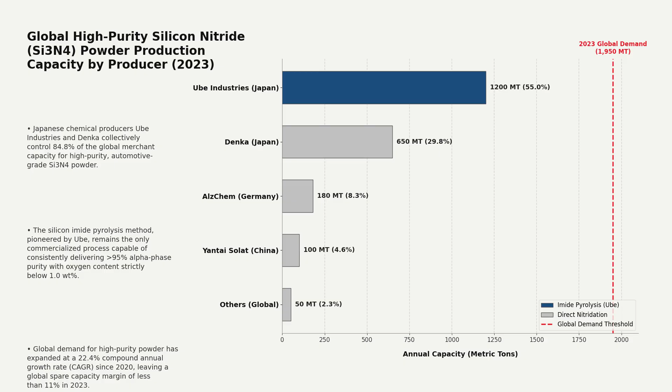Global demand has expanded at a 22.4% compound annual growth rate since 2020. This rapid growth has reduced the global spare capacity margin to less than 11%. The scarcity of high-purity powder has directly impacted downstream automotive manufacturing. Lead times for precision hybrid ceramic bearings escalated from 12 weeks in 2020 to 52 weeks in 2024.

This surge directly tracks the market penetration of 800-volt drivetrains. During this same period, the price index for high-purity silicon nitride powder rose by 210%. High energy intensity in precursor synthesis and slow capacity expansions have capped output.

Automotive manufacturers cannot easily substitute these components. High RPM drivetrains operating above 20,000 RPM require the dielectric properties of ceramic bearings to prevent catastrophic failures. The transition to high-efficiency silicon carbide inverters remains physically bound by these chemical processing limits. Alternative synthesis routes, like direct nitridation, struggle to meet strict automotive standards.

Direct nitridation of silicon powder fails to consistently achieve the 95.0% alpha phase purity required for high-fatigue applications. This structural deficiency leads to premature mechanical failure under high rotational stress. Furthermore, excess oxygen content in alternative powders degrades grain boundaries. This degradation causes the ceramic balls to fail at high speeds.

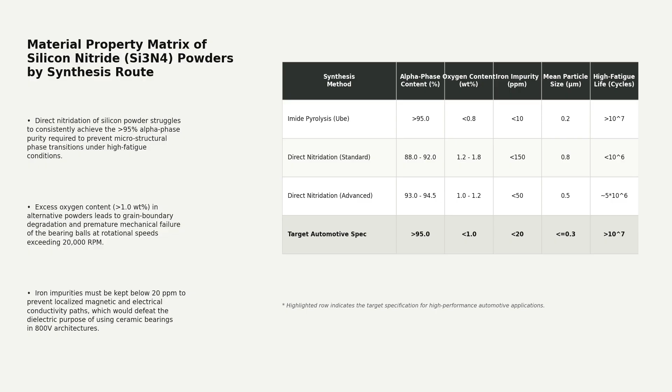Iron impurities must also remain below 20 parts per million to prevent electrical conductivity paths. These strict chemical parameters protect the dielectric integrity of the bearing. Consequently, the automotive industry remains dependent on the specialized imide pyrolysis process. This material reality limits the speed of the global electric vehicle transition.

The rapid scaling of offshore wind turbine architectures has outpaced the civil engineering capacity of maritime ports. To lower the levelized cost of energy, manufacturers have expanded turbine capacities from 5.0 megawatts in 2015 to 15 and 20 megawatt platforms today. This transition has driven a nonlinear increase in component mass and physical dimensions. Modern nacelles now exceed 820 metric tons, requiring specialized quayside load-bearing capacities.

Legacy port infrastructure at Esbjerg remained capped at 40 metric tons per square meter. This structural deficit prevents the handling of 15 megawatt-plus turbine components without risking quayside structural failure. By 2030, planned 20-megawatt turbines will feature nacelles weighing 1,100 metric tons. These systems will require 70 metric tons per square meter of bearing capacity. This requirement exceeds even the current expansion designs, threatening to cap future turbine scaling.

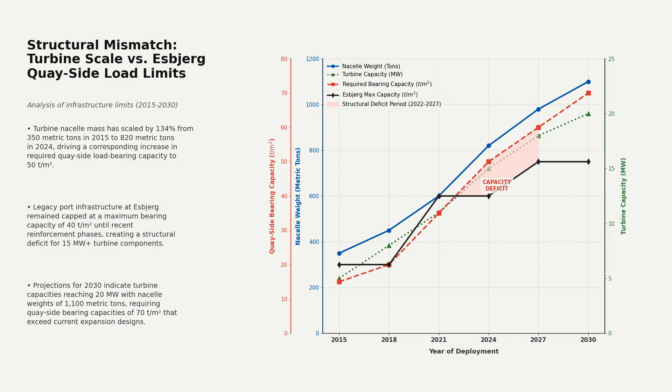The lag in civil engineering projects directly delays regional decarbonization targets. The cumulative North Sea offshore wind installation backlog is projected to peak at 4.2 gigawatts in 2025. This bottleneck directly correlates with the delayed expansion of the Esbjerg terminal. Soil consolidation and marine dredging requirements prevent the new 500,000 square meter quayside area from reaching operational status until late 2027. This multi-year timeline leaves developers without adequate pre-assembly and storage space. The physical limits of landside integration have become the primary constraint on offshore deployment.

This terrestrial bottleneck is compounded by a shortage of specialized maritime assets. The global fleet of wind turbine installation vessels capable of handling 15 megawatt-plus systems remains highly constrained. The fleet is projected to grow from just 2 vessels in 2022 to 11 by 2027, leaving little margin for operational delays.

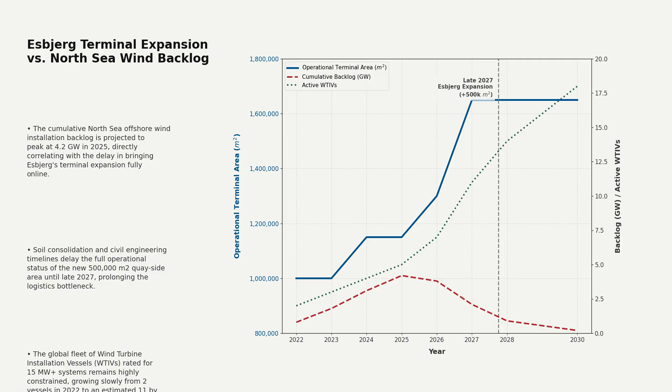The transition to 5G telecommunications and high-voltage electric vehicles has placed unprecedented stress on passive component supply chains. A single premium electric vehicle requires up to 10,000 multi-layer ceramic capacitors. These components rely on ultrafine barium titanate dielectric powder to stabilize voltage and prevent electrical noise.

The production of this critical material is highly concentrated. Two Japanese chemical companies, Sakai Chemical Industry and Toda Kogyo, control 75% of the global merchant market. This creates an acute geographic and industrial bottleneck for advanced electronics.

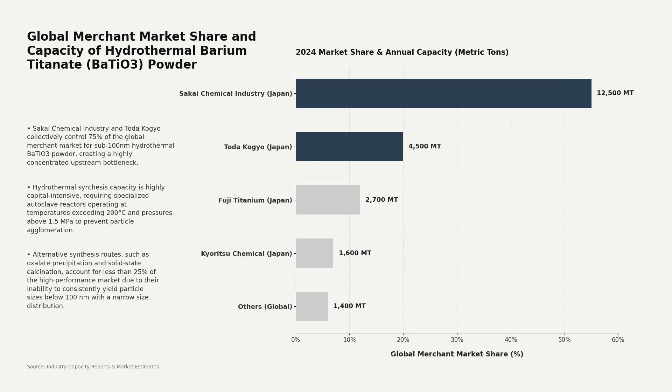High-performance capacitors require hydrothermal synthesis to prevent particle agglomeration. This liquid phase process requires specialized autoclave reactors operating at high temperatures and pressures. Alternative synthesis methods cannot consistently produce the sub-100 nanometer particle sizes required for modern high-density applications. To increase capacitance within standardized footprints, manufacturers must stack hundreds of ultra-thin dielectric layers.

Since 2015, dielectric layer thickness has decreased by 79%, now reaching 0.25 microns. This shrinkage forces a corresponding reduction in barium titanate particle size to under 35 nanometers. At these microscopic scales, material uniformity is critical. Any particle size variation exceeding 10% of the layer thickness causes localized dielectric breakdown. In high-end automotive capacitors with over 1,200 layers, such defects can reduce production yields by up to 40%.

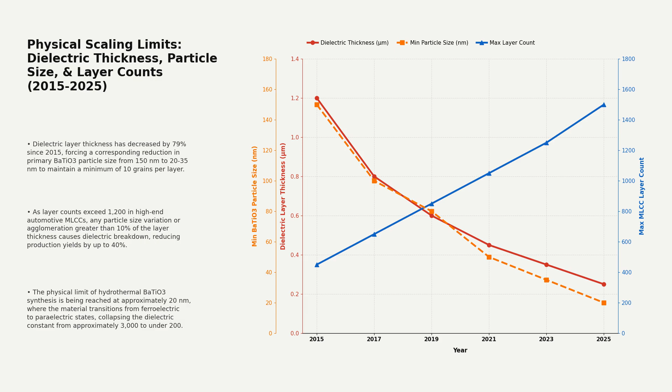Furthermore, the industry is approaching an absolute physical limit at 20 nanometers. Below this threshold, barium titanate transitions from a ferroelectric to a paraelectric state. This phase change collapses the dielectric constant from approximately 3,000 to under 200, rendering the material useless for high-capacitance applications.

The Iberian Peninsula operates as a structural energy island within the European Union. Despite possessing over 30% of Europe's total regasification capacity, Spain and Portugal remain physically isolated from the broader European gas grid. This isolation is enforced by the Pyrenean mountain range. The landside pipeline network crossing the Franco-Spanish border is limited to just 2 interconnectors. Together, the Larrau and Biriatou pipelines cap maximum export capacity to France at just 8.0 billion cubic meters per year. This represents a permanent ceiling on Iberian energy integration.

During the peak of the European energy crisis in 2022, Iberian LNG imports rose to 36.5 billion cubic meters. Yet, 35.5 billion cubic meters of regasification capacity sat idle. The Pyrenean bottleneck allowed only 11.1% of Iberia's total capacity to flow north. This physical bottleneck has driven severe economic inefficiencies across the European continent.

To replace Russian pipeline gas, Central European nations bypassed low-cost Iberian infrastructure. Instead, they deployed temporary floating storage and regasification units in the North and Baltic Seas. These emergency marine deployments came at a massive premium. German floating terminals cost an estimated 220 million euros annually for 15.0 billion cubic meters of capacity. In contrast, the permanent deepwater terminal at Sines operates at just 45 million euros per year.

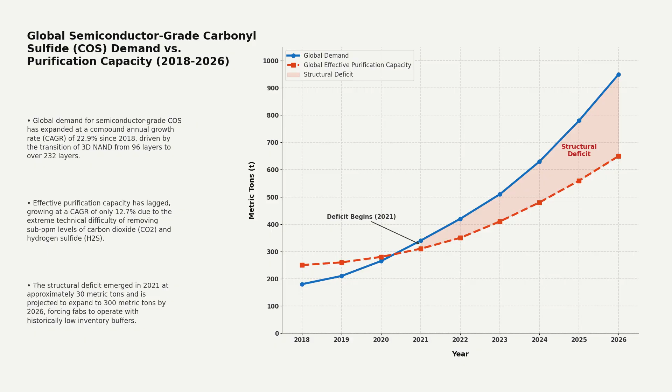As memory layers stack higher, the process window for successful etching shrinks. Carbonyl sulfide flow rates in the plasma chamber must scale nonlinearly to maintain sidewall passivation. Flow rates rise from 5 standard cubic centimeters per minute at 64 layers to 150 at 320 layers. The protective sulfur polymer layer must also thicken to withstand prolonged high-energy ion bombardment. Without this precise passivation, lateral etching causes channel bowing and structural collapse.

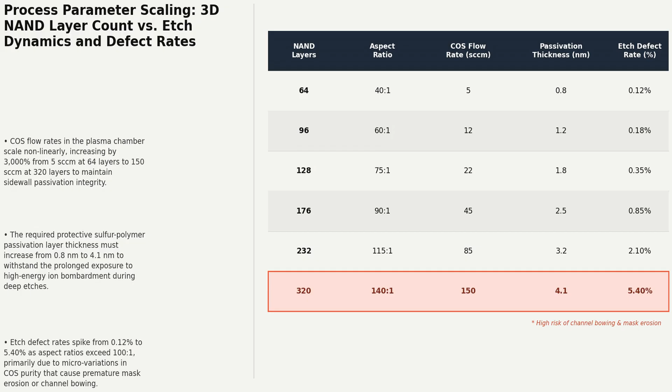Consequently, minor variations in chemical purity cause etch defect rates to spike. At aspect ratios exceeding 100:1, defect rates rise from 0.12% to 5.40%. This exponential risk profile makes advanced memory fabs highly sensitive to chemical consistency. The physical limits of silicon are now governed by sub-parts per million chemical purity.

The supply chain supporting this critical process is highly consolidated. Two Japanese chemical manufacturers, Resonac and Kanto Denka Kogyo, control over 60% of the global merchant market. This geographic concentration exposes the entire semiconductor industry to single point-of-failure risks. Expanding capacity outside of East Asia is constrained by severe environmental and regulatory barriers. Synthesizing carbonyl sulfide generates highly toxic and corrosive intermediates like carbon monoxide and hydrogen sulfide.

Obtaining environmental permits for new synthesis facilities in Western jurisdictions is extremely difficult. Furthermore, qualifying a new purification source at a Tier 1 memory fab requires 24 to 36 months. Fabs must verify that metal contamination remains strictly below sub-parts per billion limits. This lengthy qualification timeline prevents rapid substitution during supply disruptions, locking in the current geographic monopoly.

The port of Gdynia has transitioned from a commercial Baltic gateway into a critical dual-use military and agricultural node.

Following the blockade of Black Sea trade routes, Gdynia became the primary conduit for redirected Ukrainian grain and NATO heavy armor. This rapid maritime expansion has exposed a severe structural mismatch between wet-side handling and dry-side rail evacuation. While total maritime throughput at Gdynia expanded by 25.4% between 2019 and 2024, landside rail capacity contracted. Rail evacuation capacity dropped to 10.2 million metric tons due to infrastructure degradation on Polish railway line 201.

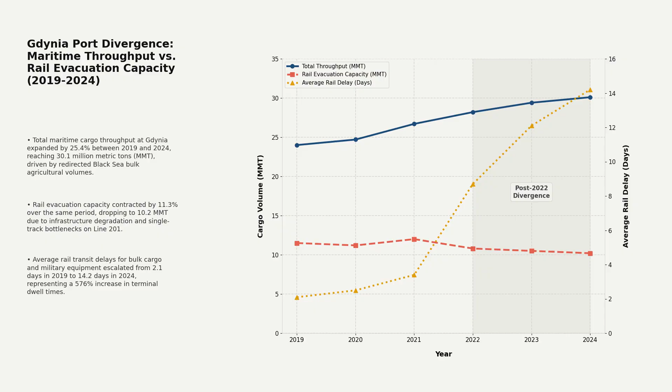This divergence has caused terminal dwell times to surge. Average rail transit delays for bulk cargo and military equipment escalated from 2.1 days to 14.2 days over the same 5-year period. The physical limit of the port is no longer determined by its berths or cranes. The bottleneck has shifted entirely to the terrestrial rail network. The primary landside bottleneck is Polish railway line 201.

This corridor connects Gdynia to the southern industrial hinterland, but fails to meet basic NATO military mobility standards. The line's axle load limit is capped at 22.5 metric tons. This weight restriction prevents the transport of fully loaded M1A2 Abrams tanks on standard flat cars. Moving these 64 metric ton combat vehicles requires specialized, scarce heavy-duty rolling stock.

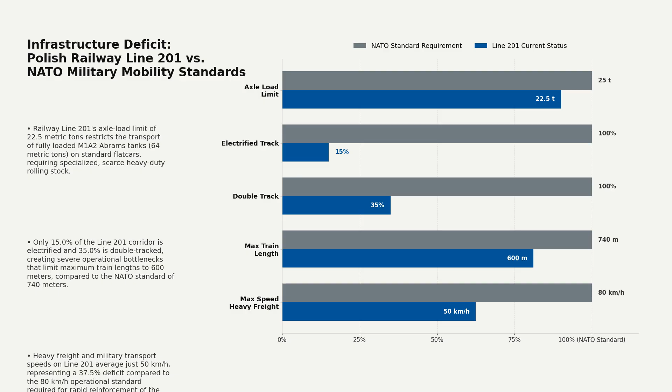Furthermore, only 15% of the corridor is electrified, and only 35% is double-tracked. These physical constraints limit maximum train lengths to 600 meters, well below the NATO standard of 740 meters. Heavy freight speeds average just 50 kilometers per hour. This structural deficit directly compromises the rapid reinforcement capability of NATO's eastern flank during a regional crisis.

Deepwater oil and gas wells exceeding depths of 5,000 meters operate at the physical limits of hydrostatic control. Traditional drilling fluids rely on suspended solid weighting agents like barite to achieve high densities. However, these solids precipitate under extreme thermal conditions, causing irreversible reservoir damage and plugging pore throats. To bypass these physical limitations, the offshore industry transitioned to clear, solids-free brines.

While conventional halide brines, like zinc bromide, achieve high densities, they are highly corrosive to chrome alloy casings. They also pose severe environmental hazards in maritime environments. High-purity cesium and rubidium formate brines have emerged as the only viable alternative. They offer densities up to 2.30 grams per cubic centimeter without solid additives. Furthermore, they remain non-corrosive and thermally stable up to 220 degrees Celsius.

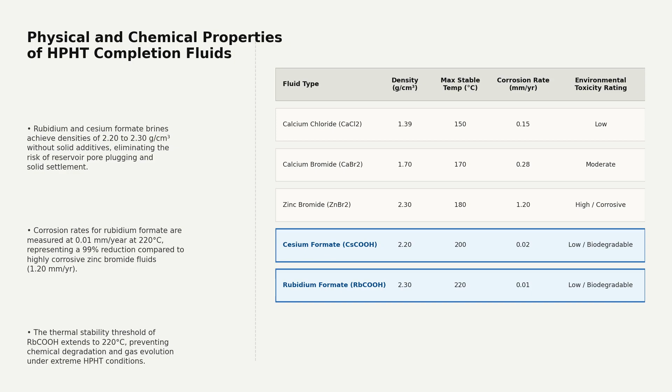The critical vulnerability of this technology lies in its extreme supply chain concentration. Following the 2019 acquisition of the Tanco mine in Canada by China's Sinomine Resource Group, the global supply of these high-density brines became monopolized. Sinomine now controls 86% of the global merchant market. This consolidation has driven a rapid escalation in operational costs. Average rental rates for high-purity formate brines rose from $1,200 per barrel in 2018 to $3,200 per barrel in 2024. This represents a 166% increase in raw material costs.

To mitigate supply constraints, operators must adhere to a strict rental and reclamation model. Contracts now mandate a downhole fluid recovery rate of 98.0%. Consequently, any downhole fluid loss during drilling directly threatens the financial viability of multi-million-dollar offshore campaigns.

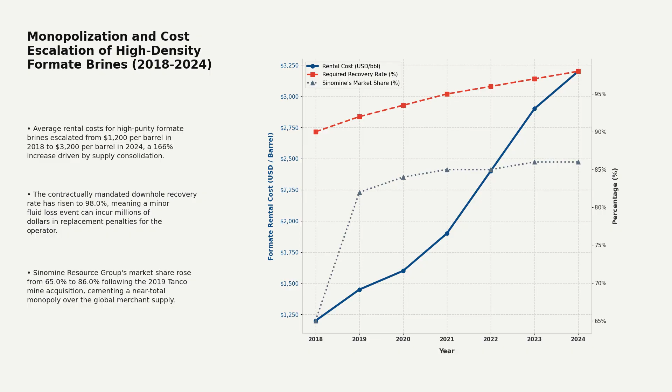The geopolitical rupture of 2022 abruptly severed Finland's primary inland maritime corridor. The Saimaa Canal passes through the Russian-leased Vyborg district. Following the imposition of sanctions, commercial transit through this 43-kilometer waterway effectively ceased. This sudden closure stranded the industrial logistics network of southeastern Finland. Prior to 2022, the canal carried over 1.3 million metric tons of raw timber and mineral aggregates annually. By 2023, this volume collapsed to near zero levels.

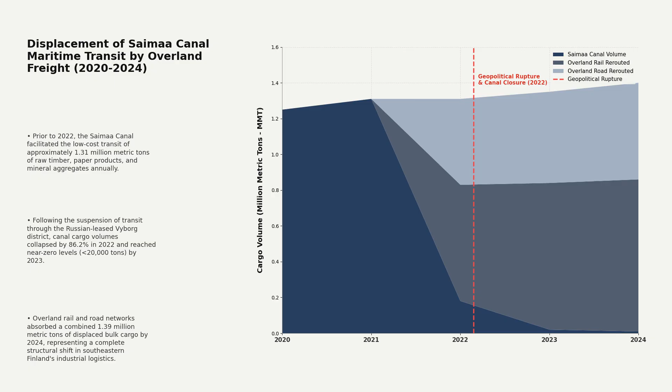The regional economy was forced to immediately reroute this bulk cargo overland. By 2024, rail and road networks absorbed 1.39 million metric tons of displaced freight. This represents a complete and permanent structural shift in Nordic industrial logistics. Rerouting bulk commodities from low-cost maritime routes to overland networks has imposed a severe economic penalty. Average freight costs for Finnish industrial operators escalated from 15.20 euros per metric ton in 2021 to 24.80 euros in 2024. This represents a structural increase of 63.1%.

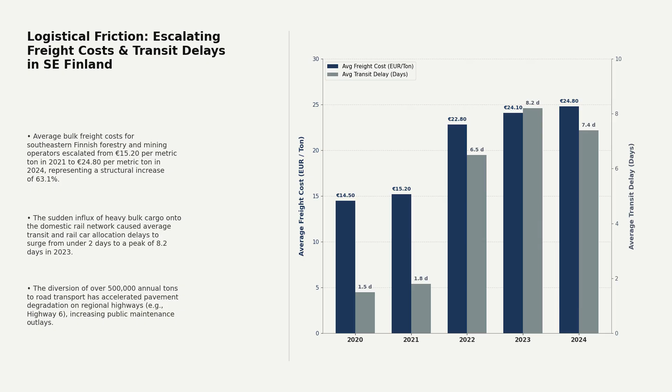The domestic rail network was unprepared for this sudden influx of heavy cargo. Average transit and rail car allocation delays surged from under 2 days to a peak of 8.2 days. This logistical friction has created persistent equipment shortages at key industrial hubs. Simultaneously, the diversion of over 500,000 annual tons to road transport has accelerated infrastructure wear. Heavy timber and mineral trucks are degrading regional highways like Highway 6. This shift has transferred private logistics costs directly onto public maintenance budgets.